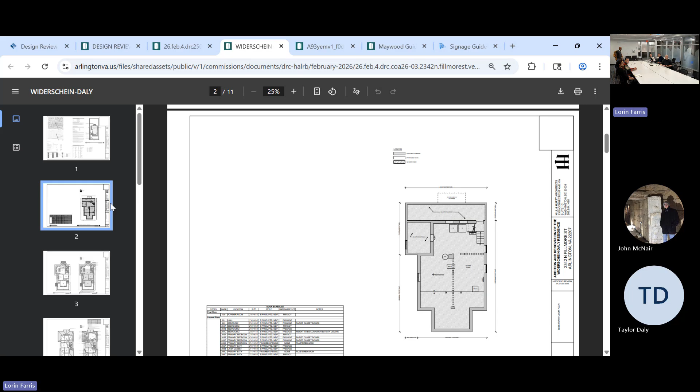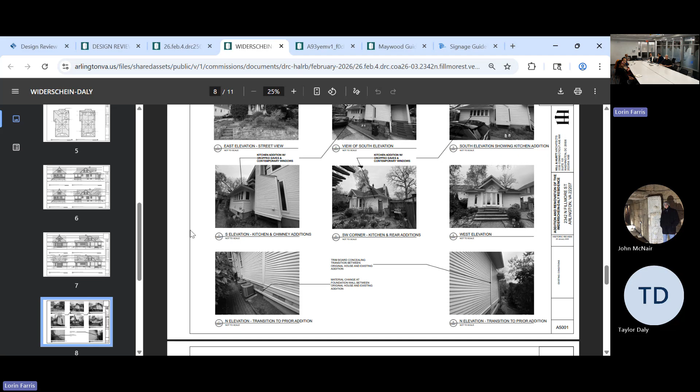Just see if I can pull it up a little bit. Okay. Some of the floor plans. And then we have the roof plan - the existing and the proposed, existing and proposed - and then we have some photos of the project, and the project team did some wonderful 3D renderings that we love. Thank you very much for doing that. That gives a very good idea of what's going on with the project, and then some more detailed specifications.

So with that, I've given the DRC the summary that you all provided with some of the changes from the preliminary review recommendations. Please feel free to go into any details you would like, and I'm happy to scroll through this. Sure. Well, if there are any specific questions that the DRC has, we're happy to answer those.

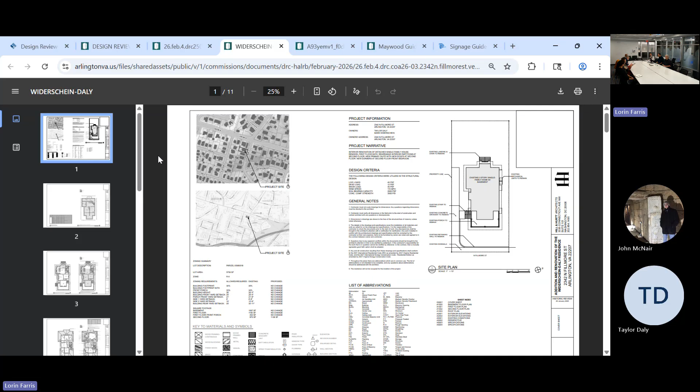Primarily, the work that we're looking at is the same as what we presented in January. The one caveat to that is really the two dormers that are now on the front of the house. So when we met earlier, we had sort of inset dormers at the front of the house where they were smaller in size and inset into the roof, and there was some concern that the inset condition might be a little bit odd looking, which is what generated the request for a 3D view taken from that street angle.

In revisiting that, we also had conversations with the homeowners, and because of their interest in preserving as much floor space as possible, it's a pretty small bedroom.

Instead of insetting the dormers, we now have dormers that are added to the roof. This also allows us to get egress compliant windows in that front bedroom, which it currently doesn't have.

The other additions are all in the back of the house. One of the things that was a point of discussion last time was that there are existing additions to the house as well. That's shown in the before and after, or existing and proposed elevations. In the existing elevations, we've shaded that portion of the house which is an addition to the original.

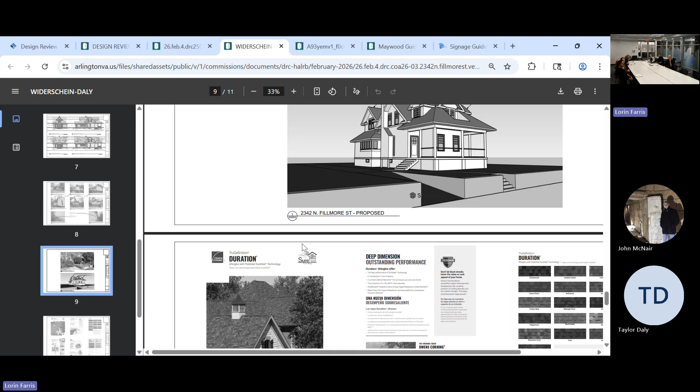Let's take a look at that. Scrolling issues, I apologize, this mouse is nice and sensitive.

I'm happy to jump in just for a couple of questions, you may have heard a little bit when you all were coming in. I just wanted to confirm some stuff with the windows.

Robert Edgo was giving me a nice little education on exactly what simulated divided lights are, because I had a concern that maybe the simulated divided lights being proposed would be the type where it's insulated glass and the muntins are just glued on inside. No, it does have the spacer bar - we have the integral spacer bar, with muntins on both sides of the glass.

And one of the other conversations we had last time was that the windows should be exterior wood, which they are as well.

I think the question I did have was on the rear - can you clarify again the type of windows that are going to be on the back? On the back elevation, right there, those are casement windows.

So that we can comply with egress once again. Okay, thank you, those are my big questions.

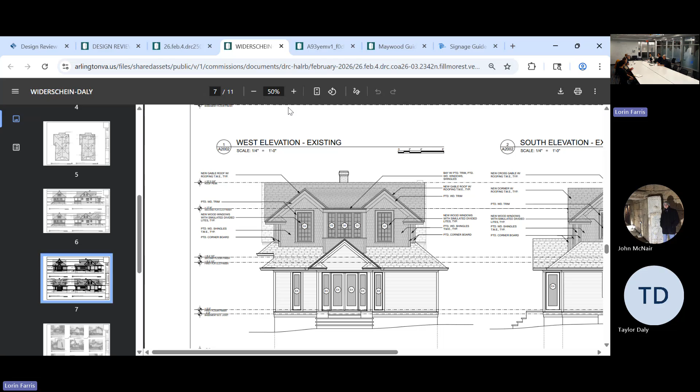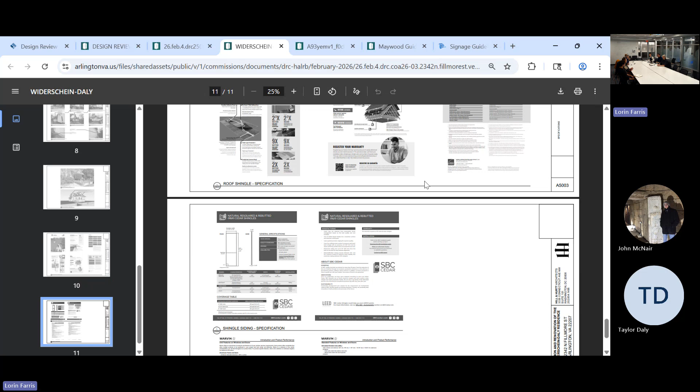My own house, yeah, I have ones that were put up 100 years old. Well, I have 100-year-old ones, but I also have 30-year-old ones that, if you do it right and do an opaque stain, you don't need to paint. I haven't painted them since they were put up 30 years ago, and they still look great.

And then the roof is asphalt shingle. So what is the existing siding? The existing siding on the first floor is a narrow, I think it's a German lap. And then in the dormers is shingles.

Because I really don't like Hardie shingles - I don't mind the Hardie planks so much, but the Hardie shingles are really thin and it almost looks like paint, there's no shadow line. So I think I would personally prefer if it was real shingles on the addition. And since the front of the house is that narrow clapboard, then you're distinguishing the new from the old, so that works. Does that work for you guys?

I think what we had put in the drawings was the actual cedar shingle specification. Yeah, which is good, I'm good with that.

I appreciate what you've done, but in view of the snow we've had the past week or so, and all of that, we're likely to get that in the future as well.

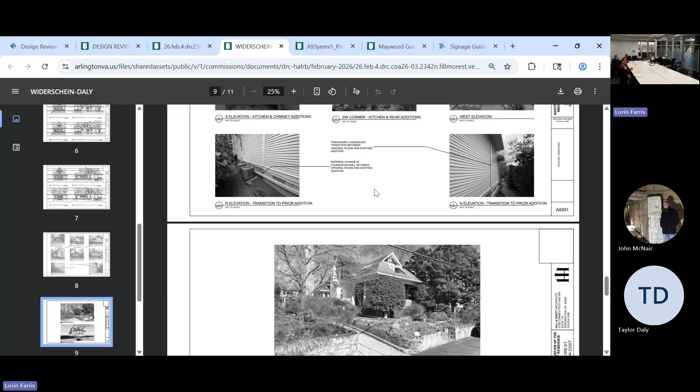Can you make it bigger? I can't, but you're going to have to bear with me. Okay, move this - we've got nothing but time. Okay, there we go, so that's what it looks like now.

Andy, to address your concern, if they were to raise that, either there'd be no window left, or they'd have to raise the whole dormer, and then we're back to having the dormer touching the ridge of the roof, which we don't like. We're trying not to do that - we had a lot of problems with another project recently.

My suggestion was really to drop - you mean you want to put a little scoop? A little scoop. I think that's a much better way of handling it. If you wanted to do that, I don't think we would have a problem with it, if you felt like you needed to do that for technical reasons.

I think we can all see what it would look like - it would just be a smaller version of what's on the front. It does make the roofing more complicated though, because now you have more flashing, and you have a flat surface, so unless you really scoop it down a lot, like 8 inches, you have the danger of building up snow.

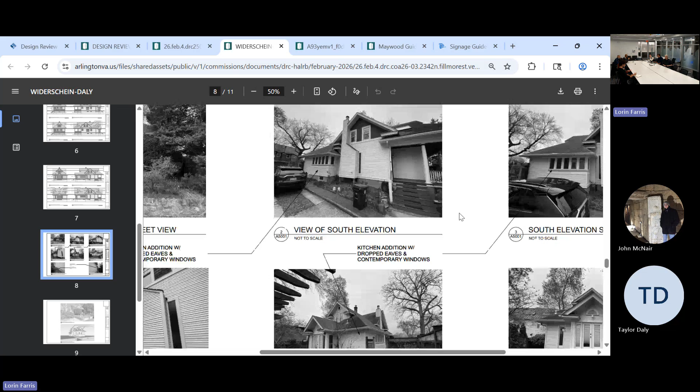I think from our point of view, if you wanted to do a shallow scoop, just a little scoop, we would be okay with it. I'm personally okay with the way that looks, as long as we make sure the homeowner is aware. So other than that, Andy, do you have any other issues with anything? I didn't get a chance to see where that's going.

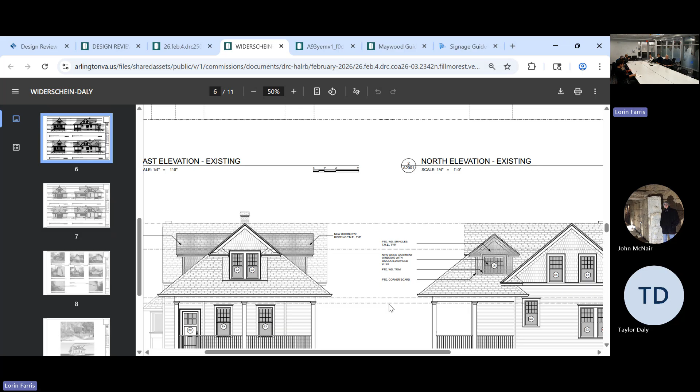I'm comfortable with the whole thing. Great. And Amari, you're - yeah, I think it's also nice to have the siding in the front and also that shingle on the back of this.

Can we look at the photograph that's just above that? I just want to see, to imagine. So right now there are skylights there.

Given that the dormer is not going to hit the ridge, you can kind of imagine what it would look like, even in the photograph, and I think that would be appropriate. So I'm good with this - I think it looks really good, actually.

What's the chimney wrapped in now? The chimney was one of the additions, it's not original to the house, and it's sided. Oh, it is sided, okay. And that's just staying.

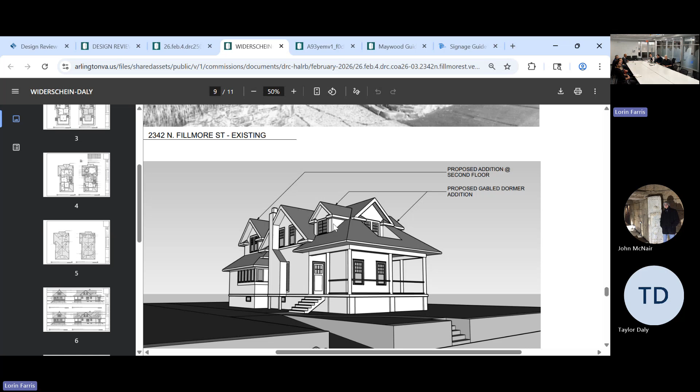So remind me again, the material on the dormer is cedar shingle? Cedar shingle. And on the rear second story addition, the same? Okay, I just want to make sure it's detailed correctly.

So now in terms of materials, we've talked about the siding, and the roofing - it's going to be asphalt shingle to match basically the front? The intention is to re-roof the whole house. There's existing asphalt shingle roofing which is pretty old, so you're going to re-shingle the whole thing and it'll all match.

Exactly, so it just needs to be a rectangular shape. And we included that information. And we've talked about the windows - they're gonna be simulated divided light in wood, painted wood. There are no exterior doors - no, all the additions and changes are on the second floor.

I think it looks really good. So do we do consent? Yeah. There you go, here, wonderful.

Thank you. So what I'll do is tomorrow I'll just send a summary of this. Consent agenda means we'll be on for the HLRB meeting on February 17th, and there'll be a moment where we'll approve the consent agenda and let you know verbally that you're good to go, and we'll give you all the approved sheets after that meeting. But if there's any public comment, or if an HLRB member has questions, that would pull it from the consent and it'll be added to the discussion agenda.

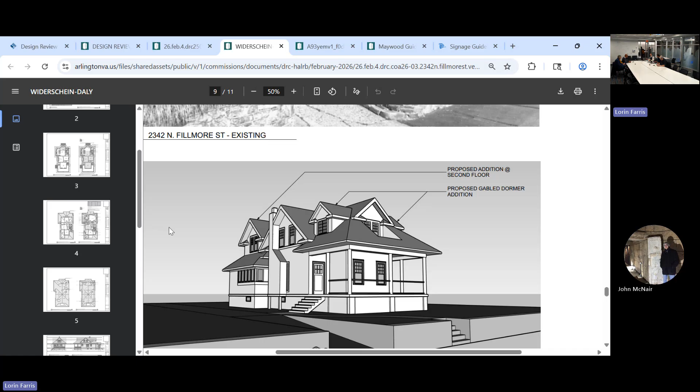So what is the... well, you can present it. I'm happy to do that. So let's just go ahead and jump into it then.

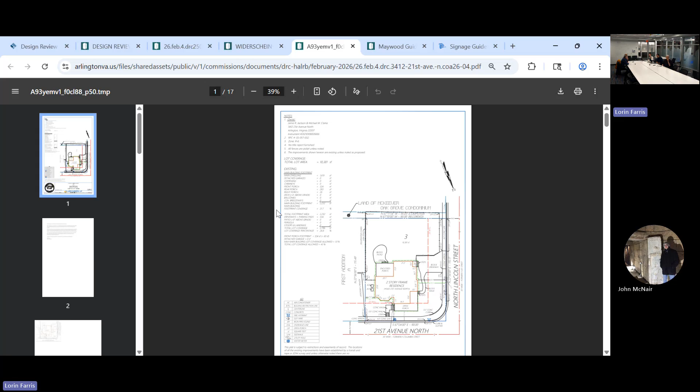So this property you all will be familiar with. This is at 3412 21st Avenue North in Maywood. This is Jamie Jackson, the owner. This property - you all saw a project for that she-shed, that accessory building with a setback at the rear of the property that got approved back in June 2024. This project is not that - they are doing a renovation in their basement. Here, I'll show you the house - it's this one right here.

They're doing a renovation in their basement and there is a window. You're gonna see - okay, I won't strain your eyes, but there's an arrow right here, let's see if I can move this back. I'm pointing where it's going to be. They're requesting - there's a little window down here, right in this little niche that goes into the basement. Again, you still can't see it.

Can you see it yet? There you go. That is the window. They want to make that an egress window.

So that's kind of in the front, it's right there, but it's also tucked away. There is vegetation that's covering that window right now, but of course it's gonna have to go away. They give us some idea of what the egress window would look like.

So they're just proposing this now. Yes, this is preliminary. They're proposing it.

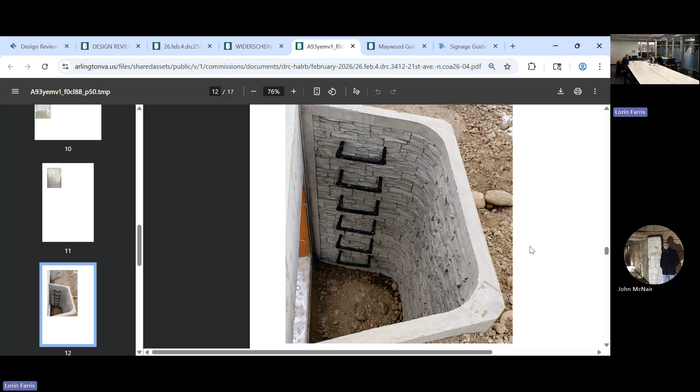So look, some of the questions when they join us, hopefully in 3 minutes - these are some ideas of what this is gonna look like. We all know what egress... but are these all examples in Arlington?

Well, these are good, you're asking some good questions, Robert. I'm not sure, because I know you're gonna answer the question. I'm anticipating. They do give a breakdown a little bit of some of the dimensions, but some of the questions that I have with this one is, first off, they say there's gonna be a guardrail.

I want to understand where that's gonna be. And then not only that, they say the width is 12 inches, but they don't tell us the depth.

I think it's more than 12 inches, doesn't it? It'd be like 3 feet. Yeah, it's gotta be 3 per the code - that's why I have questions on the dimensions of what it's going to be.

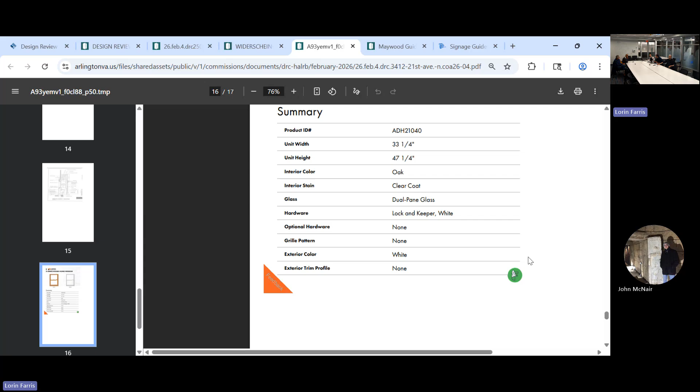And then they show us a window that they're proposing. This is interior, this is exterior, but they don't say what the material is.

Have they verified that that window meets egress requirements? Because it looks a little small to me. Well, they say it's 33 by 47, so I don't know.

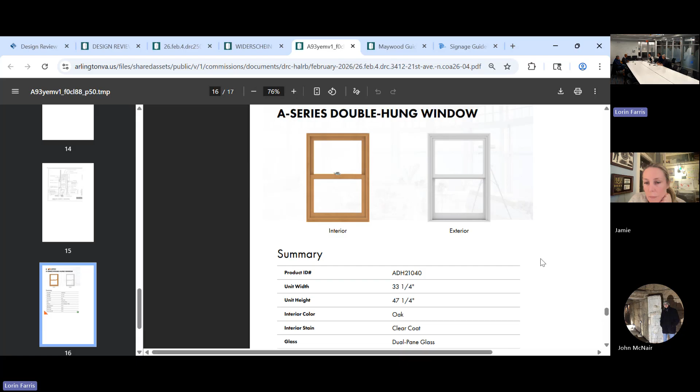If it was a casement, it might work, but if it's a double hung, there's a minimum required clear area. And a double hung doesn't actually open the whole thing. So the manufacturers all have an actual clear opening that is the legal clear opening, and if that isn't big enough to meet the code, it won't qualify.

What we don't want is for them to come back, put it in, and then we start all over again. No, I hear you - they need to...

Well, I think, Jamie, are you online right now? Hi, yes I am. Hi Jamie, thanks for joining. I know that we started a couple minutes early - I was just kind of going over the plans that you gave us. So thanks for being here.

We understand that this is a request for an egress window in this little niche area of the house that fronts 21st Avenue. We have some questions. Sure.

So one of the questions that I have is, do you have the dimensions of what the egress well is going to be? Because the specs that you gave didn't give us that detail. So I would like to know what the width and the depth is. Do you know what that is?

Oh gosh, I don't know off the top of my head. I can go back and try and quickly look through the contractor's emails about the dimensions. So the dimensions of the actual window well.

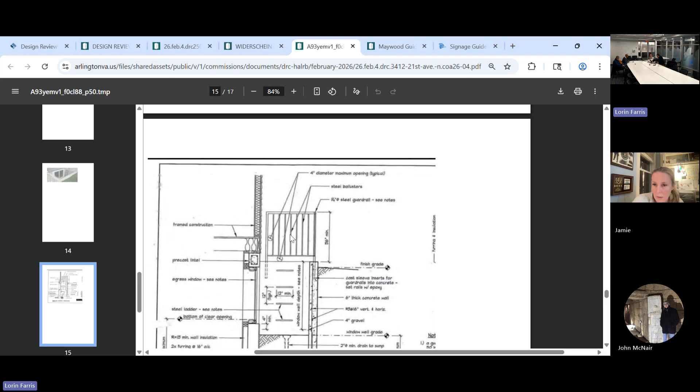Yeah, and there also seems to be a guardrail. I'm trying to get an understanding of exactly where the guardrail is going to be. Okay.

And we were just talking about the dimensions of the window - it looks kind of small. We don't know if you all need to confirm that that window, if it's a double hung, will meet the requirements for the type of window that needs to go in this well. So do you know if they've confirmed that?

I believe they have. I'm not sure why he would recommend an egress window to us without it meeting code, but crazier things have happened. It looks close, but I haven't done this in a while, so...

Yeah, it looks a little small to me, but maybe they just put a bigger window. I mean, not wider, but just taller. If the well goes down deep enough, they might be able to put it deeper. The fun thing is the Maywood design guidelines don't give any specifications on these types of windows.

So I will be happy to admit that I don't know. I don't know, well, I think it should be - it's essentially a window being added to an existing historic structure. So we would need it to be a wood window, right? It'd have to be a wood window, yeah.

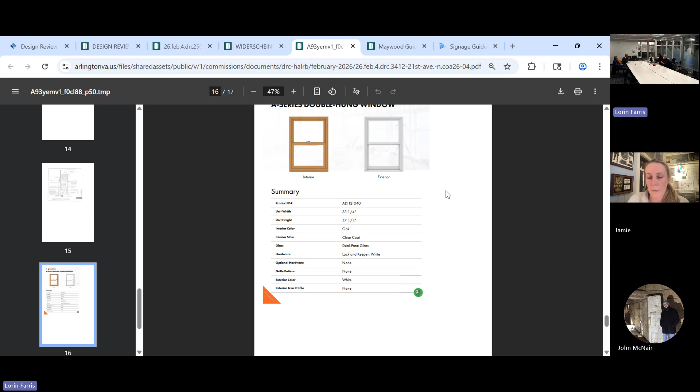There's already a tiny, very tiny window there. I don't know if you can see it in the photos. Yeah, the small one, yes, super, super small. Do you know what the material of that window is? I don't believe it's wood, but I'm not sure of the material.

Okay, so I think we need that detail - which is, the material of the existing window? Well, we will need to know if the specifications of the window meet the requirements for it being an egress window, and then I'd like to confirm the dimensions of the well, which we don't really have. And then has the contractor said anything about there being like a

guardrail over here? Do you know if that's - well, what's being proposed? I don't recall. No, I don't think we're proposing a guardrail. Okay, because in the specs that you provided, it shows that. So if it's not, then we would just need that to be crossed out. Okay.

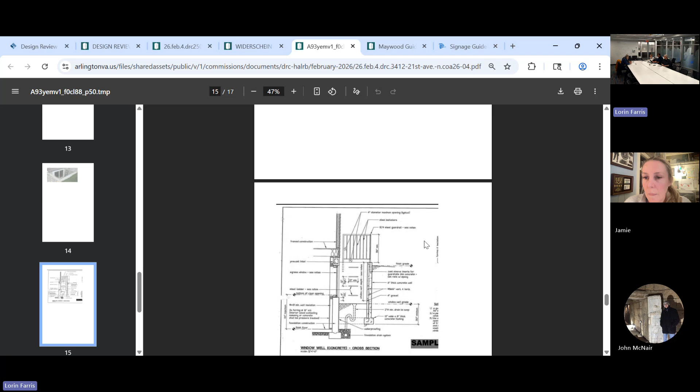I think that it needs to be verified. It's of course going to have to go through building permit to do this. But I certainly don't think we could put this on the consent agenda. Sorry, I can't hear what you're saying, sir.

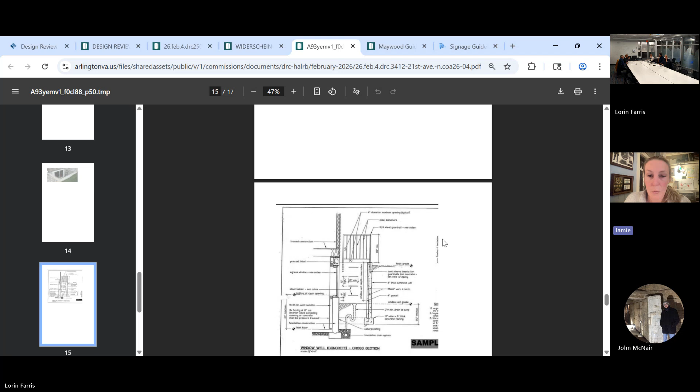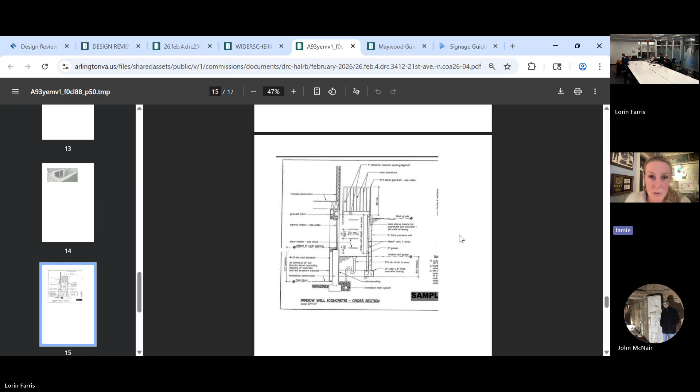I don't think we can put this on the consent agenda unless you can assure us that the window actually meets the egress requirements. I mean, I'm confident that they do. That's the reason we haven't started construction yet, because we needed to do an egress window and get your permission, so I don't know why it wouldn't. I told him that we wanted the absolute minimum amount of our house, the exterior disturbed for this project, so I assume he just chose the smallest possible window that'll meet the criteria.

Can I ask a question? Has this been reviewed? You can do a review with the building department before you do anything, because what we don't want to have happen is we say okay, you can do this, then they go file a permit, and the building department says oh no, you need a bigger window, the well needs to be bigger, you need a guardrail like this, and then you have to come back to us anyway. It'll make it faster and easier for everybody if this was reviewed, just a preliminary review with the building department,

so that they say, yep, that window meets it, the well needs to be a minimum of this size, you're going to need a guardrail with a ladder configuration kind of like they're showing, and then I assume some sort of a gate so you can open the guardrail and get out. But make sure that the building department is okay with it.

I think from our point of view, the concept of it is fine. I think it's a very good location - it's kind of hidden behind the steps. Yeah, it's pretty hidden. It's about as hidden as it gets. Really concealed, you'll never see it. And if you did a black metal rail, it would pretty much disappear.

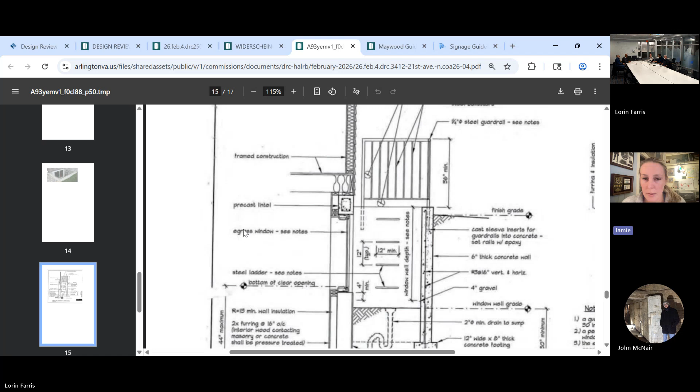And then, you may need a guardrail, but you'll need some sort of covering on top, because my brother-in-law has one, but it's more like a flat grate. Oh, so it's like a flat grate. Yes, that would be fine too. But we need to know what it is. Is there a preference, or does that not matter to you guys, if it's a guardrail or something flat on the structure to prevent someone from falling in? Either way, I think it'd be fine.

Andy, do you have a thought? No. I think for the board, as well, it'd be good to take this to the board. Just because I think it would be good.

I don't recall that we've actually done one of these with the board. We doesn't have- we have done them though. We did them at, I forget which of the garden apartments, we've done them at the Barcroft Apartments, and then we do a lot for new construction. For example, we did one for 3205 23rd Street North. So we have done that. That was back in 2021.

But we have approved these, and there's usually not- I'm not saying I'm opposed to it. I think that, I'm just, from the appearance, I'm really questioning this whole thing. Well, that's why I would like to be assured that this meets the code, because otherwise we're wasting time.

Right, and that's what we're saying, that's what she's saying. That it won't go on to consent unless there is a statement from the building department that the window size is adequate, that either a grate or a rail has been incorporated into this, and we need to know the size of the well.

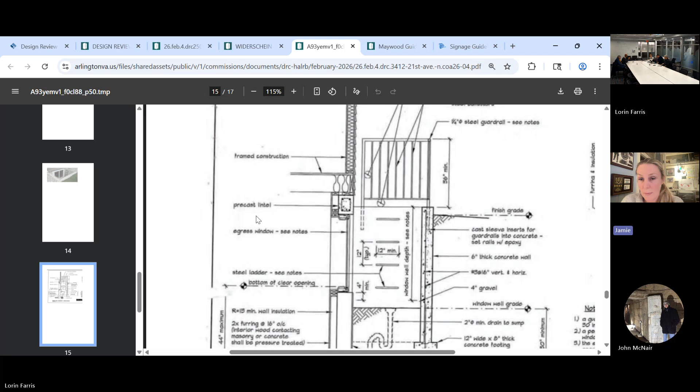Yeah, I mean, we definitely prefer to try and gather all the facts that you guys need and have it to you by next Tuesday. And Lorin, I like the idea that we could put this on consent if we get the answers to these things, but I don't like the option of, if they don't have the answers, then it goes on discussion. I think it comes back to DRC. Because we typically wouldn't go forward to the board if there wasn't a recommendation from DRC.

So Jamie, I want to make sure it's clear. You'll have a week to kind of get those questions answered. I'm happy to give you a summary of what those were tomorrow by email, and you'll have a week to try and pull that together. Then I can share that with the DRC. So the sooner you get that to me, the better, so the DRC members can feel reassured it's what you were looking for. If that's the case, it will go on the consent agenda. If you're not able to get that to us, it's not going to go on the discussion - you'll have to come back to DRC in March.

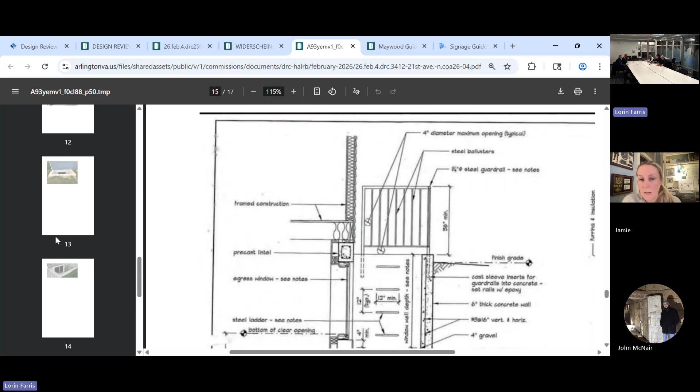Okay, that's fair. Last question - I wanted to make sure the photos you provided of these examples, are these examples in Arlington? Are these examples that your contractor has done? These are examples the contractor has done of, I believe, stucco covered concrete window wells, which is what I had read was something that Maywood liked for window wells.

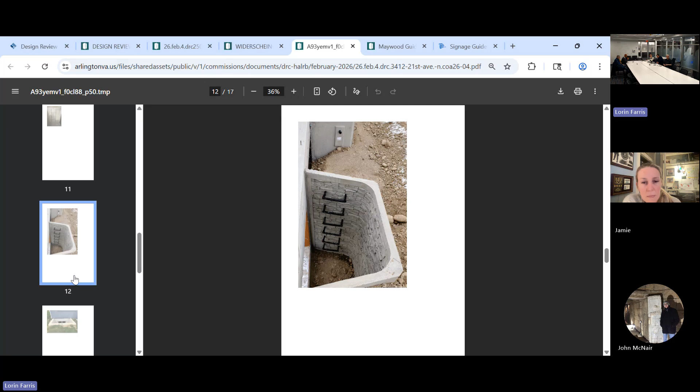Right, and I think what we wouldn't want to see is what's on the screen right now, which is that sort of faux stone interior, and also the rounded corners. But if it's rectangular, like there's another one - if it's like that, with stucco sides, and it could be stone, or it could just be carving on the top of the wall, that would be fine. And then either the metal rail or the metal grate would be fine.

And if it's to that specification, and then we have confirmation about the window, the suitability of the window, and the size of the well - I'm assuming you want to make the well as small as possible also. So I think we're both on the same wavelength there. So I think if you can get the answers to all those things, we wouldn't have any problems with this.

Okay, great. So from there, Jamie, I will send you an email tomorrow with these details just for confirmation. The sooner you get me that information, the better - that way I can confirm it and then share it with the DRC so that we can lock it in, whether you are going to be added to the consent agenda or not.

And if it is on the consent agenda, let's just say that all works out, we would still need you to come virtually at least to the meeting. The HALRB - if no one has a public comment or the HALRB doesn't pull it for discussion, then a vote is taken and it will be approved. I would say verbally it's been approved, and then you can go on for whatever you're going to do that evening. Then there could be a discussion - we would be able to go into details about this, but I would be surprised if that happens.